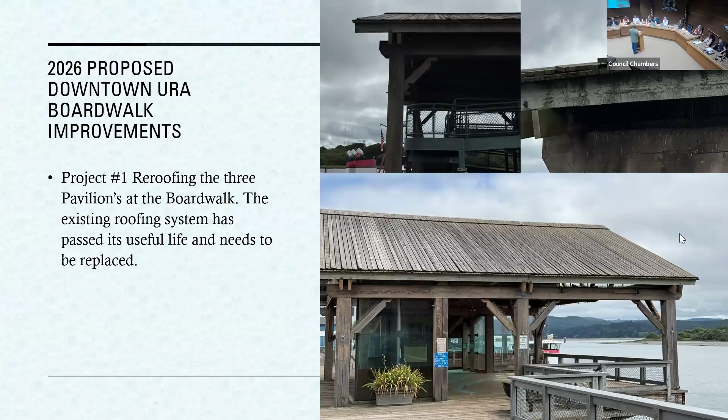There's a nice picture of a metal roof right next to this - this is the Mingus Park ball field restroom facility. We're in the process of rehabilitating that restroom, and that's the metal roof we're proposing to put on the pavilions downtown on the boardwalk.

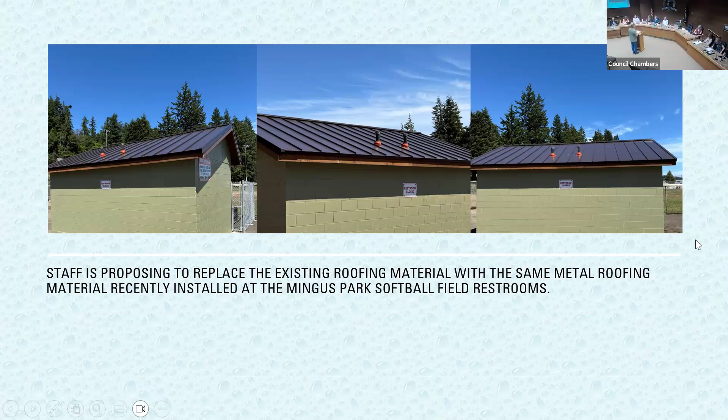So this is building compliant. It's wind load compliant as well for our area. It's also solar ready. We are advancing.

Project number 2 is the removal and replacement of about 925 to 936 linear feet of plastic chain rail that acts as a guard rail, replacing it with new handrail along the boardwalk. Staff is proposing to install a handrail that is consistent with the handrail recently installed by the Coos History Museum.

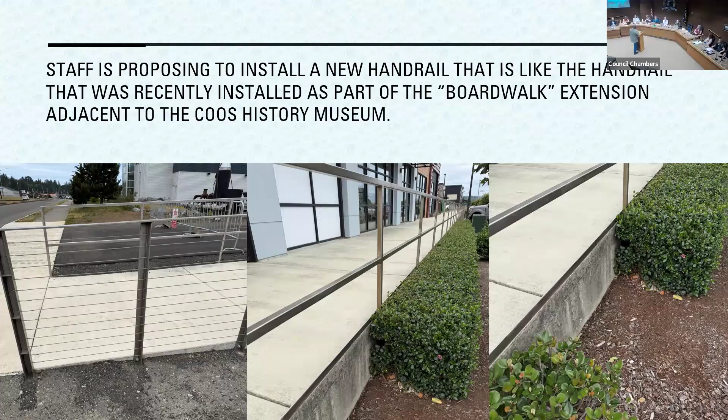Now, these pictures were taken down by Coos Bay Village, but one of the pictures, the one on the left, is taken by the Coos History Museum. The other two were taken down by Coos Bay Village. But this is the handrail material we're proposing to install, removing the older handrail. It'll just continue the effort that was already started north and bring it south. Project 3...

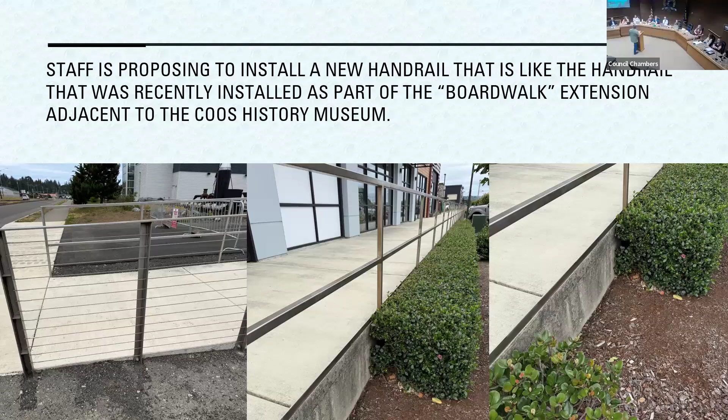Staff is proposing to install a retaining wall south of the main boardwalk ADA ramp entrance into the boardwalk. The proposed retaining wall will extend from the entrance down to the south boat dock ramp. The retaining wall will be 3 feet tall and have a 3-foot mow strip, drain rock, and drain piping.

You can see in this picture that this handrail has a plastic chain draping along the side of it. Some of these posts have some level of rot or damage done to them. Some of them are missing - you can see in the picture on the right the post is actually missing, but most of them have some level of deterioration just because of age.

So we're proposing to install a retaining wall, and then carry that handrail all along that side, all the way down. It'll be similar to the handrail north of here - we're proposing to replace the handrail all the way along the entire boardwalk with project number 2. This will just be interior, replacing this handrail, not along the side of the bay.

I thought this was talking about the retaining wall. This is a retaining wall south of the ADA ramp. Yeah, so is it going to be like the one on the north? Oh, correct, I'm sorry, I thought you said handrail. I apologize, I might have. Yeah, so the retaining wall will be similar to what's north of the entrance now.

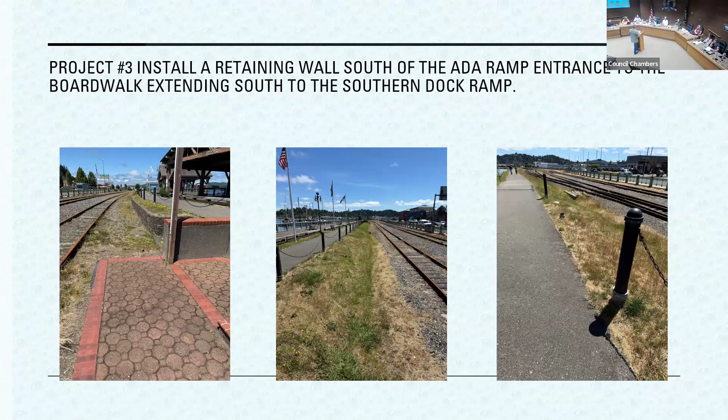The fourth project associated with the boardwalk involves the 3 pavilions along the boardwalk, but only the center one is enclosed in glass. The pavilion has become a bastion for pigeons that flock there to escape the wind and elements. Staff has implemented several deterrents, but these efforts have fallen well short of the desired outcome. This project proposes to remove the glass and install handrails around the exterior and interior of the pavilion, similar to the other handrail we're proposing along the boardwalk.

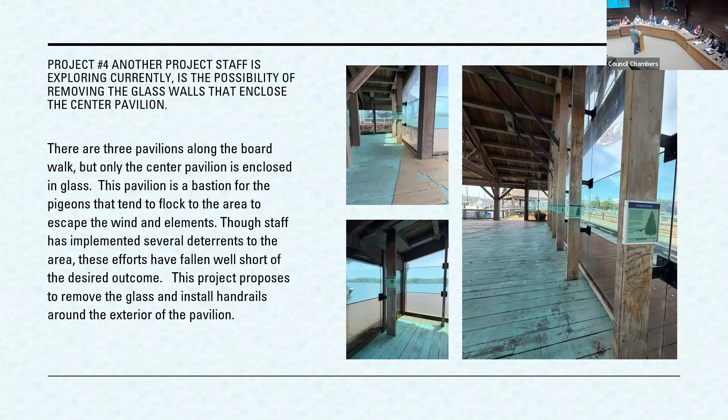This is a budget implication for the proposed downtown URA boardwalk improvements for fiscal year 2026. The Urban Renewal Area Downtown Capital Project Fund for boardwalk upgrades has a budget of $250,000. The 4 projects identified by staff total about $433,000. Council can either reduce the projects for this fiscal year or utilize $183,700 from the Urban Renewal Projects GL code account ending in 3123.

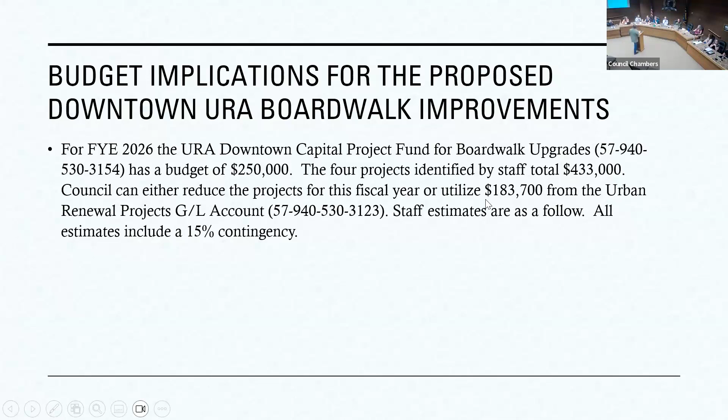Staff estimates are as follows, all including a 15% contingency. Here's how it breaks down: the re-roofing of the pavilions is approximately $88,000, the installation of the handrails is about $130,000, the retaining wall is $135,700, and the glass removal and handrail placement is about $80,000.

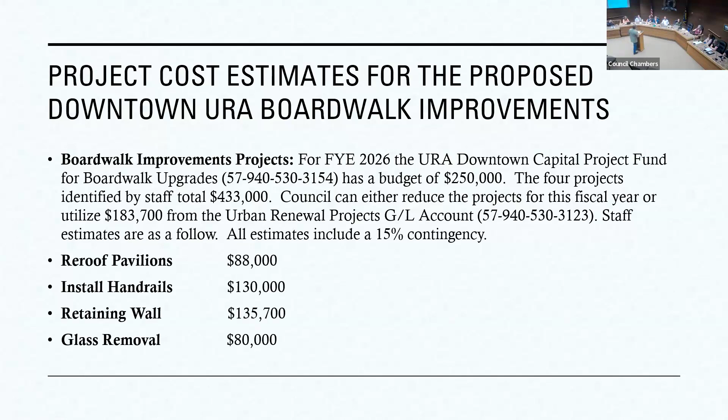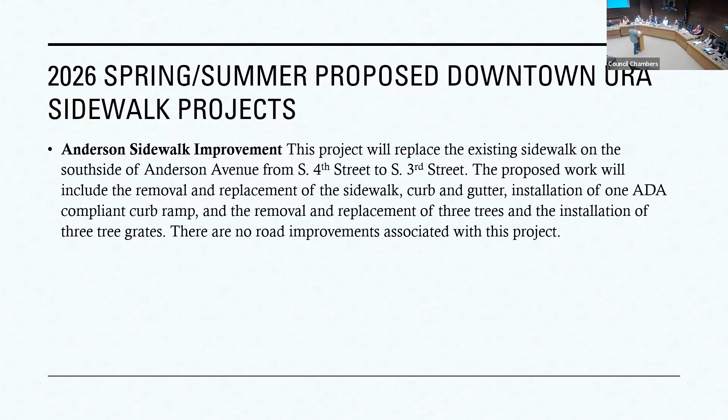In the downtown urban renewal area, we also have a sidewalk project proposed for downtown. This sidewalk project is on Anderson Avenue between 3rd and 4th Street. The project will replace the existing sidewalk on the south side of Anderson Avenue from 4th Street to 3rd Street. The proposed work will include removal and replacement of the sidewalk, curb and gutter, installation of 1 ADA compliant curb ramp, removal and replacement of 3 trees, and installation of 3 tree grates. There are no road improvements associated with this project.

This is the area where the proposed work is going to take place. 4th Street was done, and there was an ADA ramp installed at that intersection associated with the 4th Street project done back in 2021. Right now what we're proposing is the ADA ramp on the 3rd Street side.

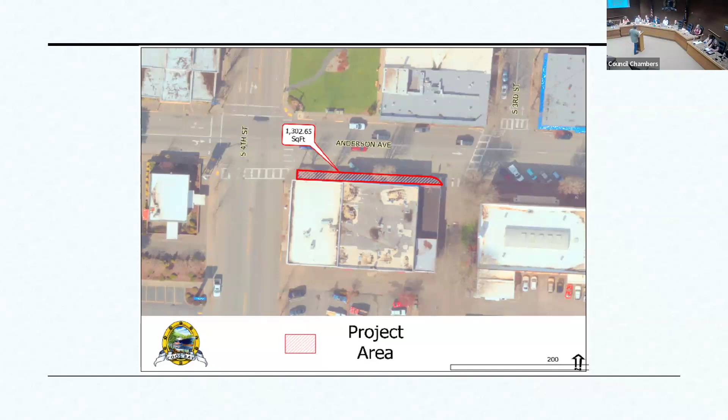This is in front of a condemned building though, correct? Yes. So is this something we should wait to do until something happens with that building? Well, I think pedestrians still use that sidewalk, and it's up to the URA. We are just proposing to do this work. So I could see if somebody comes in and does something with that building and they need to amend the sidewalk, they'd at least need to bring it up to a level, its current condition. So having it in good condition would mean it would at least be restored to a good condition. I don't know, might be something to think about. We have no idea how long that building is going to remain a problem. It is a really bad stretch of sidewalk and it gets used constantly during the farmers market, Fun Festival, and Blackberry Arts Festival, all of them. I could see fixing it up, making the curb appeal a little bit better for somebody. I don't know, that's my pitch, thank you. It was a good question, appreciate it. But I want that a lot.

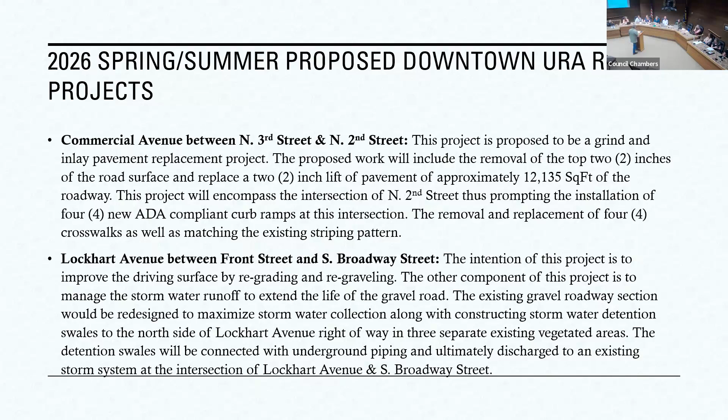The second project for the downtown urban renewal agency is to upgrade Lockhart between Front Street and South Broadway Street. The intention is to improve the driving surface by regrading and regraveling. The other component is to manage stormwater runoff to extend the life of the gravel road. The existing gravel road section would be redesigned to maximize stormwater collection, along with constructing stormwater detention swales on the north side of Lockhart Avenue right of way in 3 separate existing vegetated areas. The detention swales will be connected with underground piping and ultimately discharged to an existing storm system at the intersection of Lockhart Avenue and South Broadway Street. These stormwater controls will not only better control storm runoff but will also improve water quality.

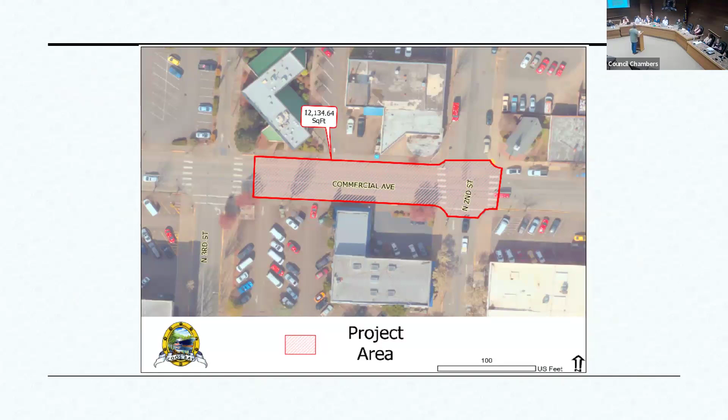So this is the project location for commercial between Second and Third. You can see we're encompassing the intersection there at Second.

And then this is Lockhart between Front Street. You can see we're moving up part of Front Street and also part of First there as well. What businesses does that area serve?

Mainly the dump. The dump is to the south, they occupy most of that frontage attached to the red area there. There's an RV repair company to the far right of the picture. Meekin's Animal Hospital is down there in the bottom left-hand corner of the image. I think a roofing company occupies one of the warehouses there as well.

Yeah, so this will be an enhancement. And then we're going to tie into U-Haul — they just completed a portion of their project where they paved down a portion of Front Street, so we're going to tie into that. They graded the road to tie into our project.

It's been a pretty challenging stretch of road too, hasn't it? It has. We've spent quite a bit of money just trying to put quick fixes in place, Band-Aids. In my 4 years as operations administrator, this has been a proverbial thorn in the side. It's been a heavy lift, if you will, with rock — there's been years and years of gravel placed on this road to try to maintain it.

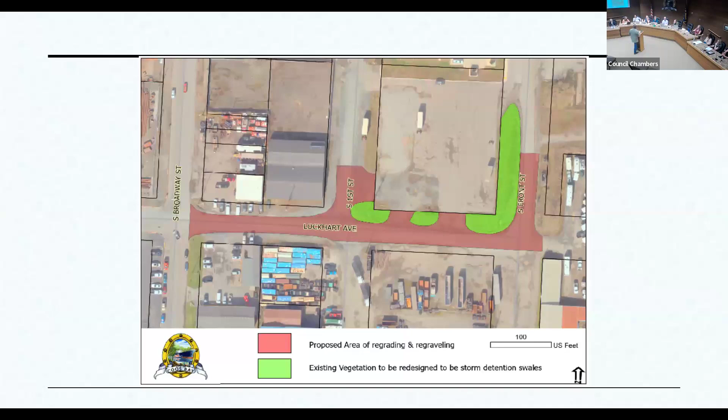So moving on, I'll wait for—maybe Christine, there we go. So this is the budget implications for the proposed downtown road improvements.

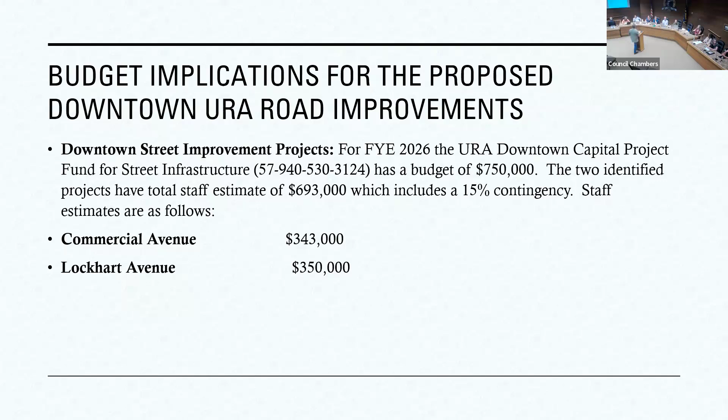The downtown street improvement projects for fiscal year 2026, URA Downtown Capital Fund for street infrastructure ending in 31/24, has a budget of $750,000. The two identified projects have a total estimate of $693,000, which does include a 15% contingency. Staff estimates are as follows: Commercial Avenue, about $343,000; Lockhart Avenue, about $350,000.

This effort will tie into the already completed 30% design for the north half and identify any easements, land conflicts, etc. that need to be resolved for final design, similar to the efforts performed during the 30% design for the north half. Once completed, staff can move the entire portion of Front Street forward to final design.

One reason why staff wants to move forward with this approach is to prevent any rework. In other words, if only the north half is moved forward to final design, there will have to be a transition design and construction near Cedar where the new improvements meet the existing Front Street. Designing and constructing this at one time will cost more, but removes that transition, alleviates any rework, and has the potential to reduce escalation in the overall project costs.

So are you saying that all $750,000 is just going to design work? Right now, yes—there's not going to be anything tangible that comes from that, that we can see physically, like hard stuff on the earth.

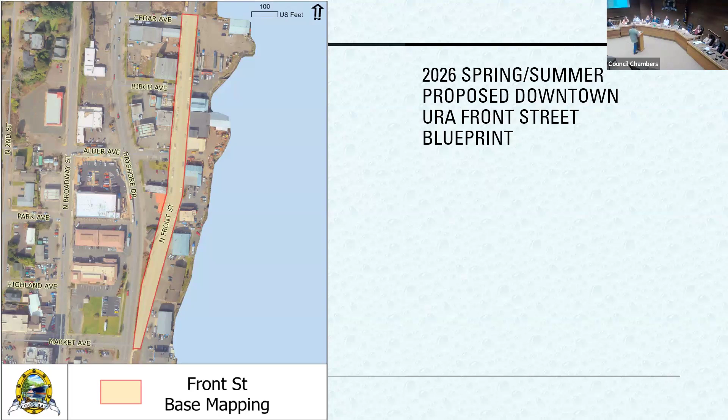Carry on. So this is a map of the proposed area in which staff is proposing to bring to 30% design with this Front Street South proposal. As Jennifer alluded to, we will come back with a design effort if we elect to move forward with this, but we'll follow up with that more later on.

So the Empire URA, the Empire Road projects proposed for 2026 spring and summer include Newmark Avenue between LaClair Street and the eastern boundary of the Empire URA.

This project will replace only the 4 vehicle travel lane surfaces in both directions of the arterial road. The turn pocket lane does not need to be replaced at this time. The proposed work will include the grind and inlay of the top 2 inches of the road surface and replace it with a 2-inch lift.

Approximately 31,345 square feet of the roadway will be repaired. This project will remove and replace the current striping, replacing it in kind.

through the disturbed areas. The other road proposed with this project, with the Empire URA, is South Marple between Newmark and Michigan Avenue. This project is proposed to do a grind and inlay again, removing the top 2 inches of the road surface and replacing it with a 2-inch lift of pavement. Approximately 23,529 square feet of the roadway will be repaired.

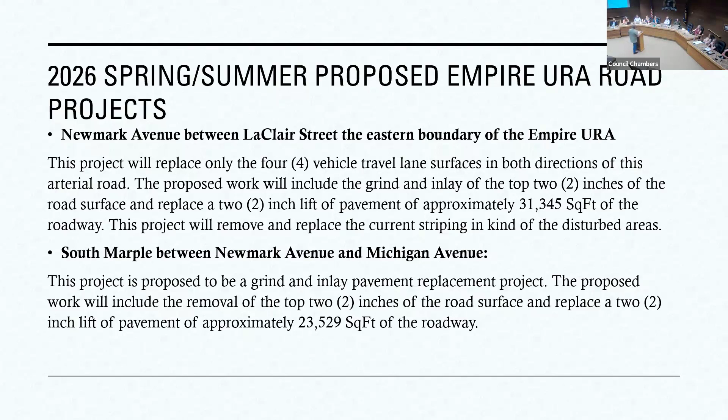And then the other proposed project for the Empire Urban Renewal Agency is the Empire Roundabout. This project plans to improve the intersection of Newmark and South Empire Boulevard with the development of a roundabout, and reconstructing Newmark from South Empire Boulevard to Mill Street. 30% design has been completed. This phase is to perform the final design and cost estimating, which can be used for bidding documents and construction.

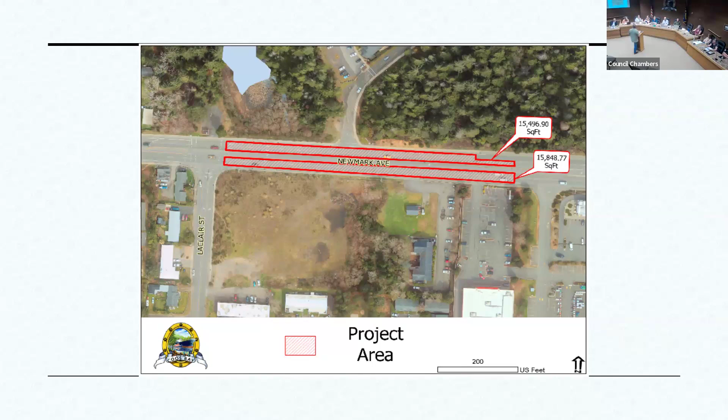So this is Newmark Avenue, basically between the eastern boundary of the URA to LaClair. Here we're just proposing to do the travel lanes. This is Marple between Newmark and Michigan. We're going to go curb to curb with the improvement on that road.

And this is the roundabout. We have acquired those 2 properties to the east. One was, what's the name of that? Gary's Automotive—that's been demoed. And then the property to the north there.

So budget implications for the proposed Empire URA improvements. Fiscal year 26 URA Empire Capital Project Fund, GL ending in 31/21, has a budget of about $500,000. The 3 projects identified by staff come out to $562,000. The agency can either reduce the projects for the fiscal year or utilize $62,000 from the urban renewal projects.

GL ending in 31/23. Staff estimates are as follows, all including a 15% contingency: Newmark Avenue is $285,000, South Marple is $202,000, and to carry the roundabout into final design is about $150,000. That's just the design of the roundabout, to carry it to final design.

So I had a question about the roundabout. When that first came up and the acquisition took place a number of years ago, there was a proposed development down below, and the options were to put a traffic signal in there or some sort of a roundabout that could move traffic around there. Do we have any development planned? I thought we changed what was going on down below the hollering place.

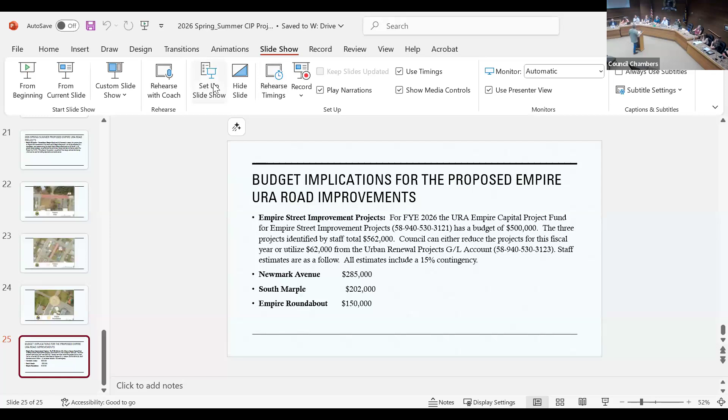Yeah, and I think we're giving some option of where you could grab some other dollars, and I was looking at what those accounts have in their budgets. You may remember for both downtown and Empire, there's usually a bucket of dollars we've not identified to go towards projects, and in both of those districts that bucket's a little over $500,000. So you do have some capacity to fill the gaps for these projects if needed.

Okay, are there any other—carry on if you need. Well, I was just going to—sorry, I'm pretty much done. The only question I have now is, if it pleases the agency, approve staff's recommendation or recommended approach to the proposed 25-26 capital improvement projects.

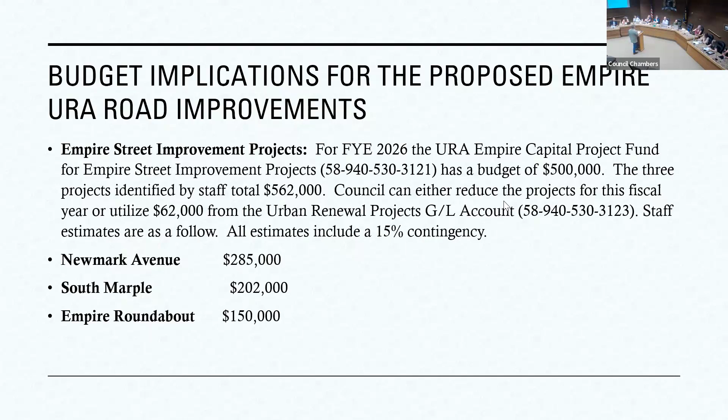Well, I don't know, I think the only thing that came up was part of Front Street, to determine if we could just stick with the northern part with the 30% design and move forward getting that finalized, and then maybe doing some construction down there without doing the south end. That was, I think, coming back with an estimate would be the only thing.

Because spend, I don't know what it was, the 30%, was it $750,000? 750? No, $400,000—I apologize, $100,000. And again, we don't know what it's going to be for that southern portion, but the budget that was adopted was $750,000. So if that was— misleading, apologies.

Yeah, and that southern end gets a little more complicated than the northern end. So I guess maybe the northern end would be easier to take on. In my mind, I hope—I don't know, but that's all. That's my opinion.

Looks like it was a lot of work. Thank you. Yes, oh yeah, that's what I do. A lot of projects here. Yes, yeah, thank you, great.

So does someone want to make a motion? So it would be that I move to approve staff's recommended approach to the proposed 2025-26 capital improvement projects, minus the Front Street recommendation.

Second? Do I have a second? Second. All right, we have a motion and a second to approve staff's recommendation for the proposed 2025-26 capital improvement projects, minus the Front Street section.